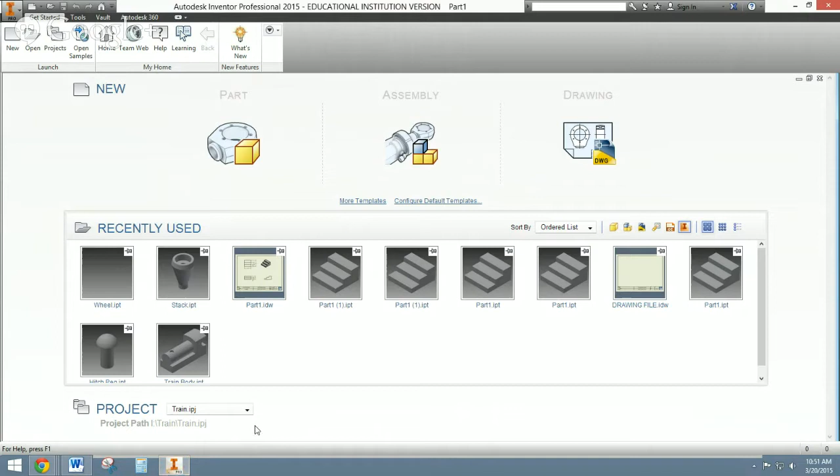Okay, so go into Inventor, make sure your project path is set. If it's not, go to Projects, click on your train project. Next, we're going to open a new file, another part file, and start a 2D sketch. This time, I am going to draw it on my XZ plane. Right? So I'm going to start my line.

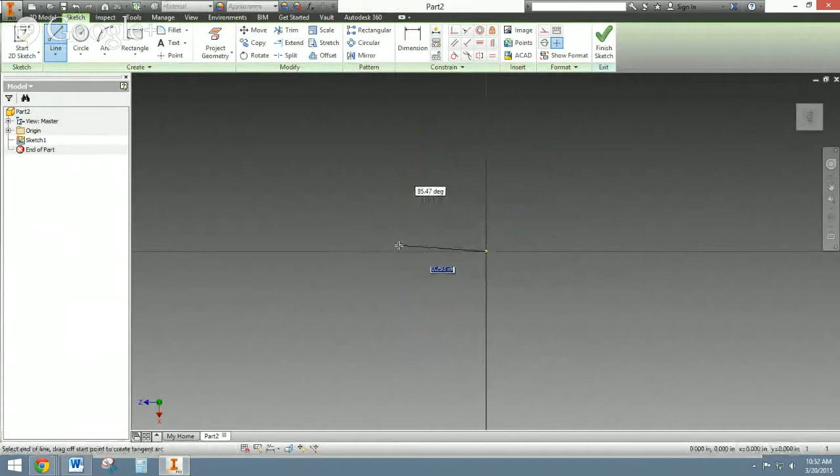Like I said, I was going to start with a line that was 1 inch long, and I was going to go down 0.25, over another 0.25, in halfway, which I can just kind of drag my line over and see it, over another 1/2 inch, down so it's centered right there. I'm just going to snap these lines over. Real quick and easy.

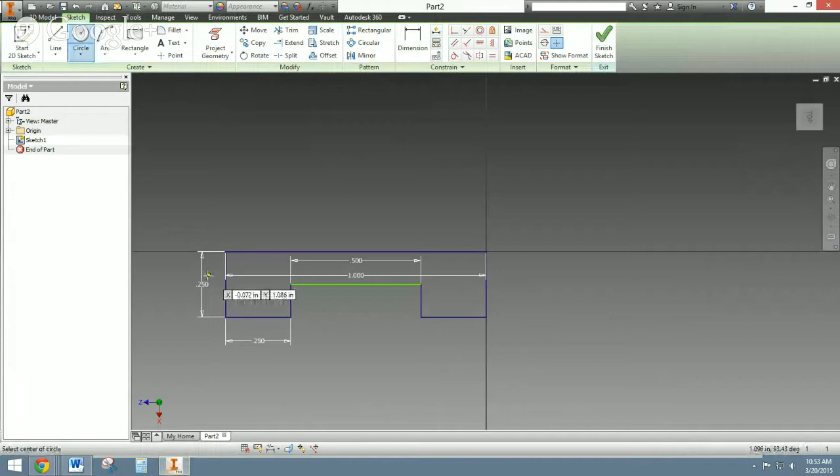You know, it doesn't look exactly like our picture yet. We need to make our circle. And then after we're all done, we're going to have to extrude this circle out of there. So my circle is real easy to make. Grab your circle, find the midpoint, and then snap it to the outside, and then just kind of trim the stuff off you don't need.

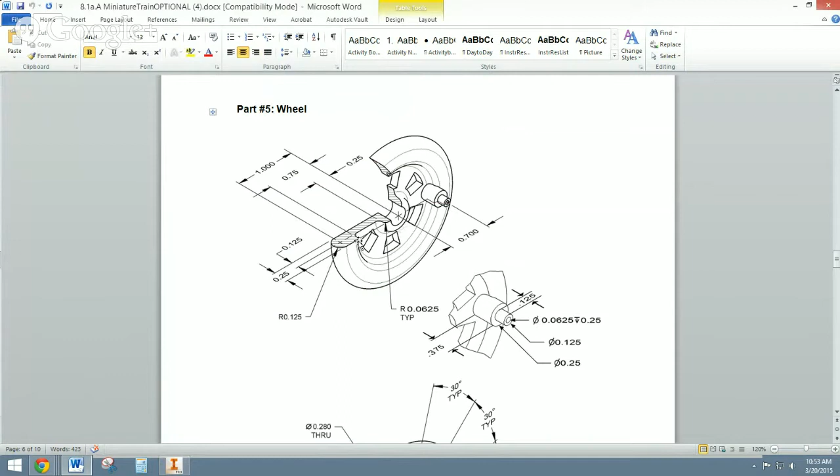And then I'm just going to make this line right here a construction line, just so it doesn't rotate with everything else. From here, I'm going to grab my fillet command, because as you'll notice, it says radius 0.0625 typical, and it looks like I have 1, 2, 3, 4 radiuses that I need to make 0.0625. So fillet 0.0625.

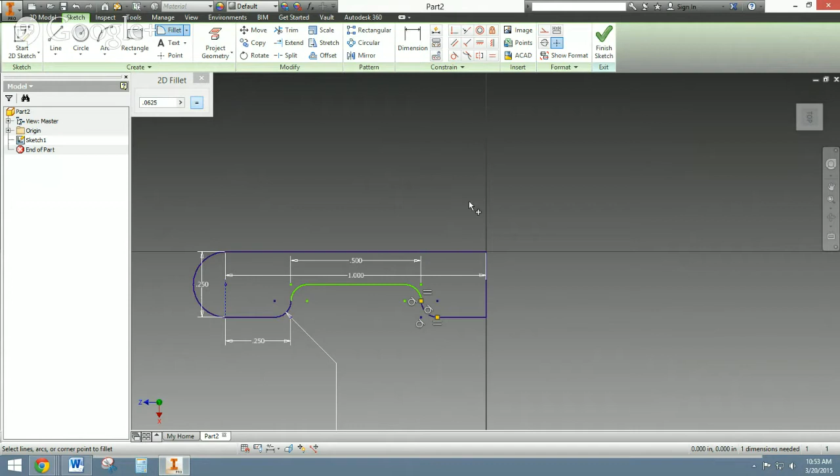Once you see the fillet starting, you just got to click. There it is. And sometimes you just got to click one line and click the other line, and there they are. Click OK. So that should be it. Hopefully your picture looks like this one. We're going to finish it up, and if you did everything right, your profile should show up.

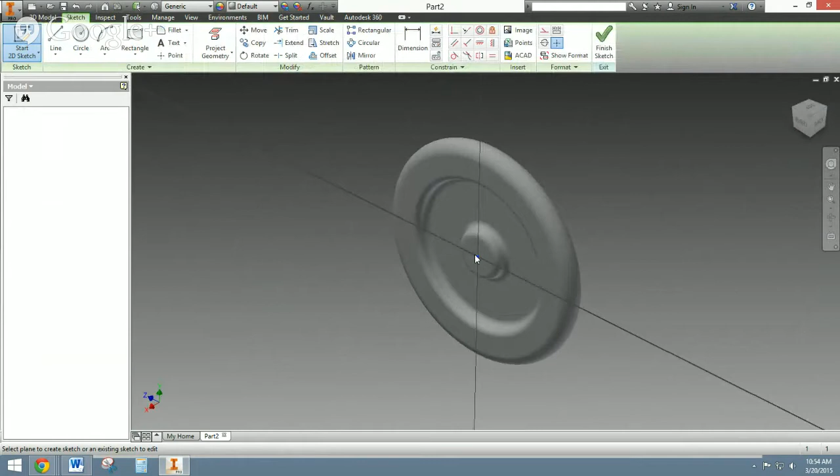We're going to choose our axis line to be this one. So as we rotate everything around, there we have the makings of our wheel. I'm just going to rotate it over. Next, I'm going to put that hole right in the middle. So I'm going to start a 2D sketch, find that surface, and if you take a look at our drawing, that hole is dimensioned at the bottom picture, and it says a diameter of 0.28 through.

So I'm going to start with a circle, 0.28 diameter. If you're on radius, make sure you right-click off of that and grab a diameter. I'm just going to cut away all and OK. And there we have the makings of our wheel. We're very, very close. All right.

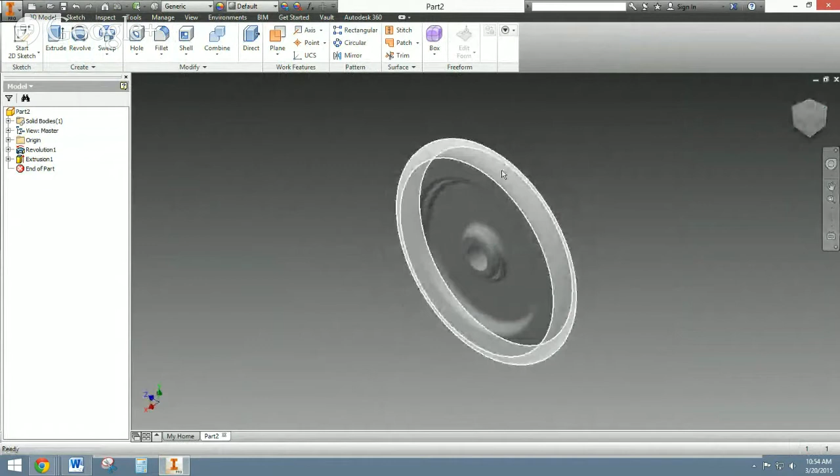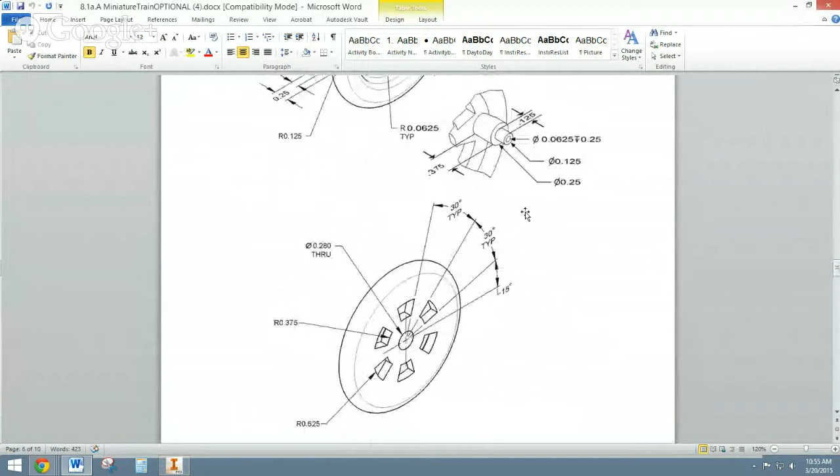The next thing I want to make are these holes in here. Now notice we can use our circular command. And this kind of tells us we're going to use a pattern, but we first need to make one in order to then pattern it around the whole thing. So in order to do that, it looks like they go to the back, and they're showing us the back right now. So maybe that's the easiest way to do it.

And then we're just going to make some circles, because it shows us an inner diameter for this portion and an inner radius and an outer radius. And then we're just going to draw some lines that have certain angles to them. And we're going to lock those in there and trim out our portion, extrude it, and then circle it around our whole part. So looks like we need a radius of 0.625 and a radius of 0.375.

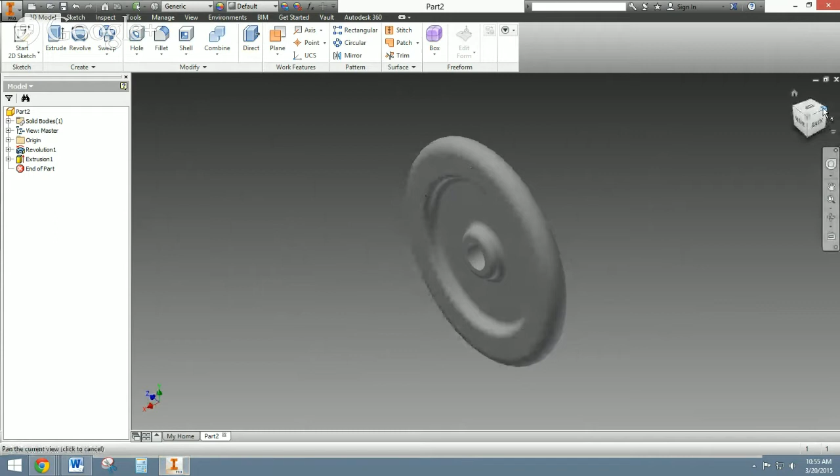So I'm just going to go to the back of my part, start a sketch on this face, make a circle, I want to say 0.625, and this was a radius. So I'm on diameter right now. I need to go to radius, 0.625. There's one, and 0.375 will be my next.

Okay, and now I just need a couple lines. So I'm just going to draw something in there, click OK, and then draw another line in there, let's say right there, and click OK. And now I'm going to dimension them. So this first line was 15 degrees from horizontal.

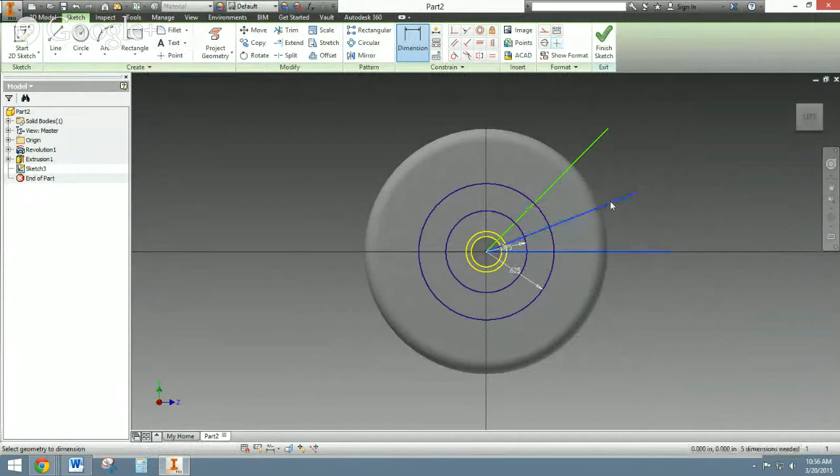So I'm just going to grab, you know what, I should make one more horizontal line. Just going to put that out there. We'll make them construction lines later. But from here to here, I should have 15 degrees. And then the way it's dimensioned later is 30 degrees from that line up to the next one. So I'm going to grab a dimension again. From this line to this one should be 30 degrees. That was pretty darn close.

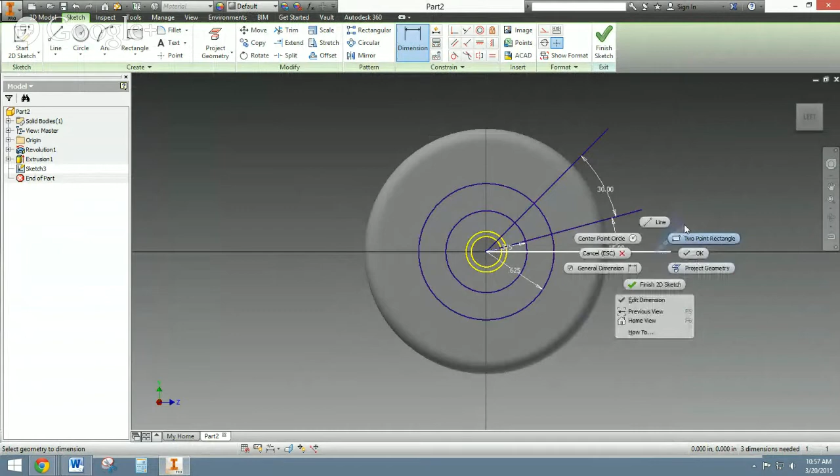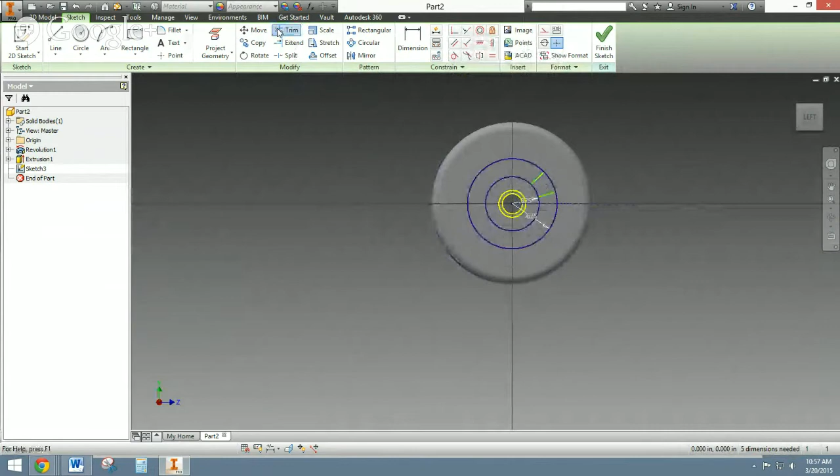All right, so now let's make this one a construction line. And then let's grab our trim and trim out all that stuff we don't need. Okay, now it did grab our dimensions out of there, so we could put those back in there if we wanted them. I'm just going to delete the remnants of these lines here because we don't need those anymore. And then I'm also going to trim out the rest of our circles. So there we have it.

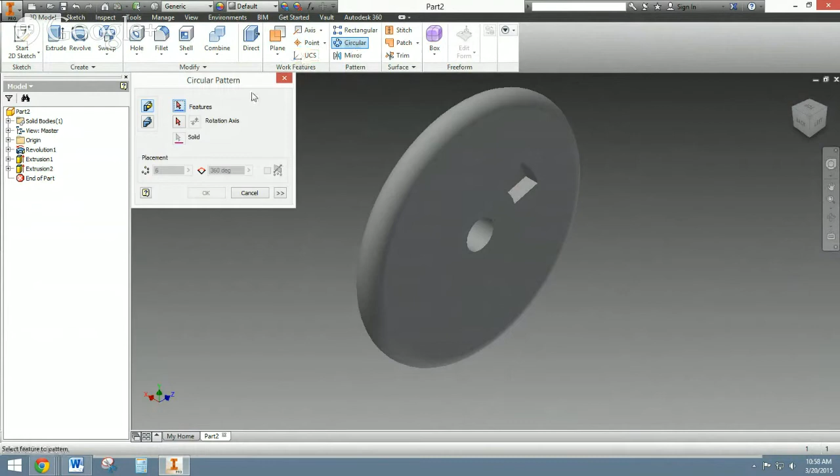There's just one portion that we're going to extrude and then make the rest of ours. There it is. We're going to cut it, go to all, and click OK. So let's look at our front now. Oh, I'm sorry. Let's keep with our back. There's our back. Now we're going to use our circular command. The feature we're going to grab is this one right here. Rotation axis, we're just going to grab this one.

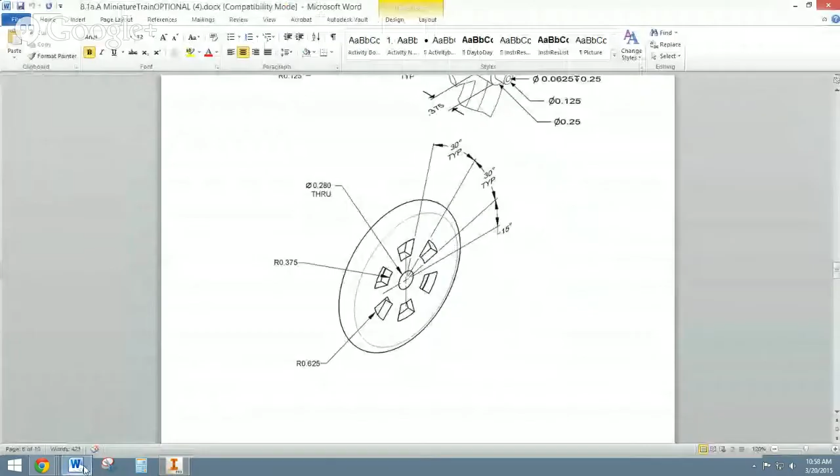I need it 6 different times, so 1, 2, 3, 4, 5, 6, perfect. 1, 2, 3, 4, 5, 6, and click OK. And there we are. Getting really close to being done now. The next thing I need to do is make this little feature, okay? And it looks like it's kind of right on the face, right in between these two holes. So I'm going to start a sketch right on that face. And then I'm going to start making some circles that are 0.7 inches away from my center line.

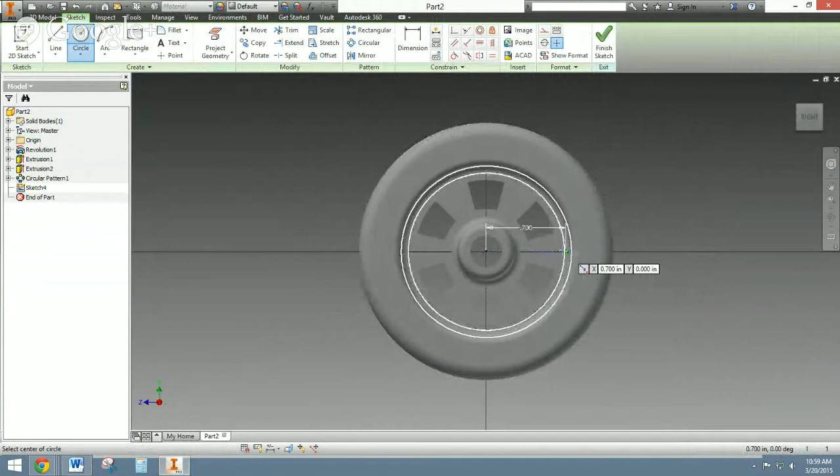So start a sketch. I'm going to start it right here. I'm going to draw one line over, make it horizontal, 0.7. I'm just going to make that a construction line right away. I'm going to make my first circle. Notice it's going to overlap a couple things. That's okay. That first circle, it looks like it has a diameter of 0.25. So we're going to need to grab a diameter again. So right-click in diameter, 0.25.

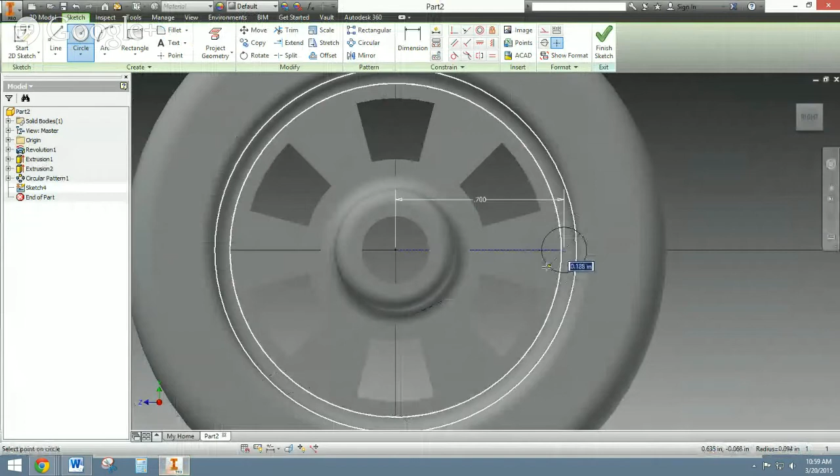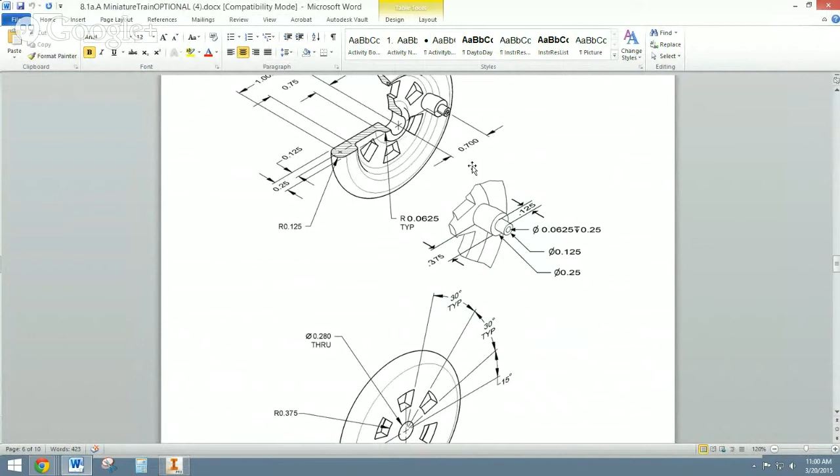Once we have that, even though it's hidden, we should be able to extrude it. There it is. We're going to extrude it out 0.375. Enter. All right. Now it does look a little bit big, but that's okay. That's exactly how it's supposed to be. So it's going to look that big versus our wheel. Let's see if this looks about the same. Yeah, about the same. 0.375. Looks like we did our job. All right, we're just going to keep it as that, even though it looks a little bit off to what this is telling us.

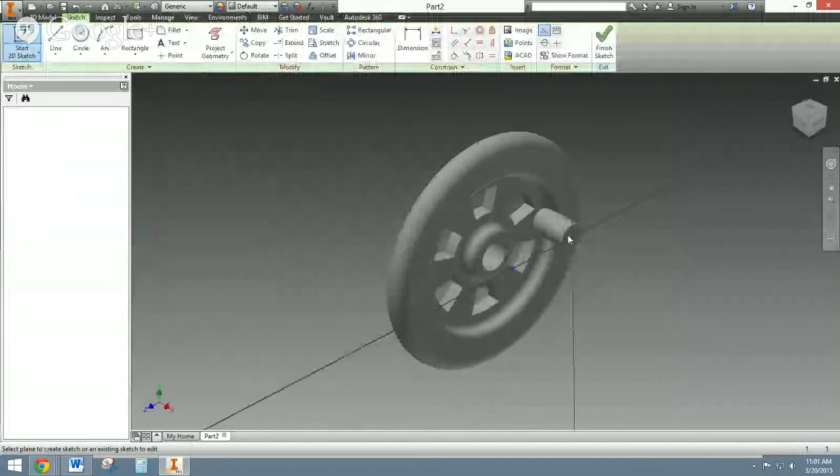All right. The next thing that we need to do is go create a sketch on that new flat surface circle that I just made and make a 0.125 diameter circle, 0.125 extruded up. So create a sketch right here. We are on diameter already, so 0.125. I'm going to extrude that, 0.125. And then I think we're going to make another sketch right on top of that.

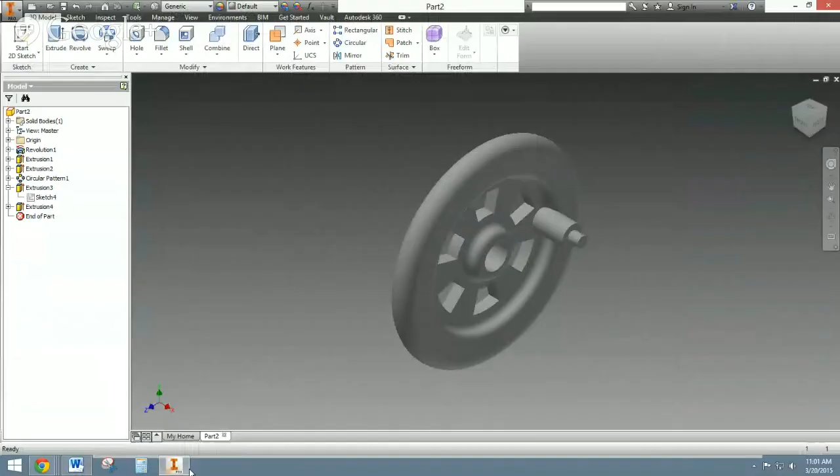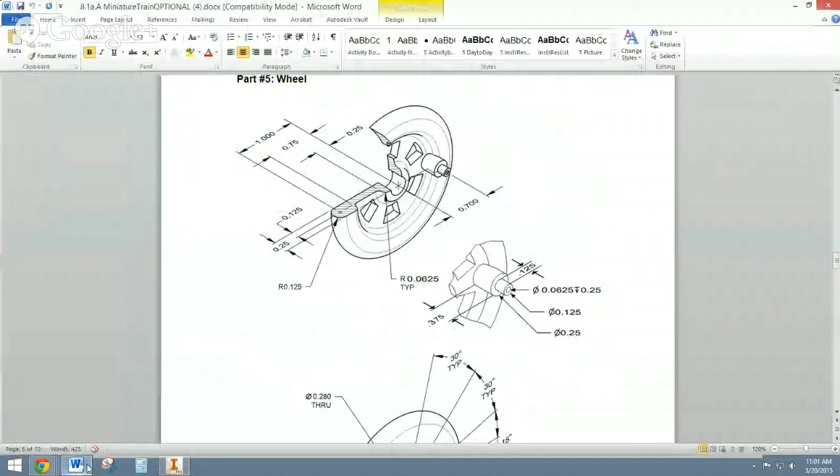Yep. This one's going to be a diameter of 0.0625 and then 1/4 inch deep. So we're going to cut away material. So 0.0625. Create a drawing right here. I'm just going to zoom in so I can see what I'm doing. 0.0625. Extrude, cut away material. And we're going to cut away 0.25, I believe it was. 0.25 deep. There it is. All right. That's everything to it.

Now, I think I'm going to go back and change how deep this extrusion was because it looks a little bit big from what I see right here. But for the most part, that's what we're looking at. That's an easy fix to make. Let's instead maybe make this 0.3. Maybe that looks a little bit better. Okay. So any way you want to fix that up, that's just fine. But this is the basis of how we do our wheel for the Project Lead the Way Train project. I hope you had fun, and I hope you learned something.